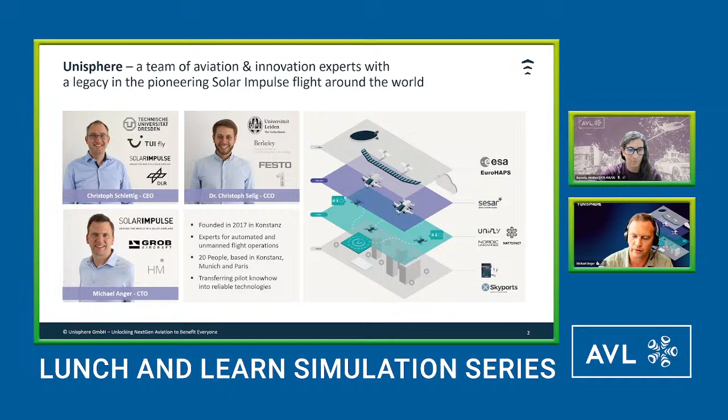Then the more new innovative air mobility segment of air taxis and eVTOLs. The drone space is the main space we are active in these days with software tooling and some infrastructure projects. So to say, we are passionate, and the whole team is aviation enthusiasts. So we have also a long-standing history in that space, and we originate out of the Solar Impulse project.

I'm not sure if one of you guys have heard about that project. It was the first solar-powered airplane flying around the world in 2015 and 2016, purely solar-powered, and it was basically giving the starting point for electrified aviation as we know it today. This is 10 years ago, but there's still a lot in common with what we do today.

For example, the solar powered aircraft at that time was flying very slowly with about 25 knots indicated airspeed, had the weight of a mid-sized car and the power of a scooter. So you can imagine that flight planning in those days was very challenging, especially as some legs of this flight around the world were quite long, and the longest flight was from Nagoya in Japan to Hawaii in a 5-day and 5-night flight, continuous by one pilot.

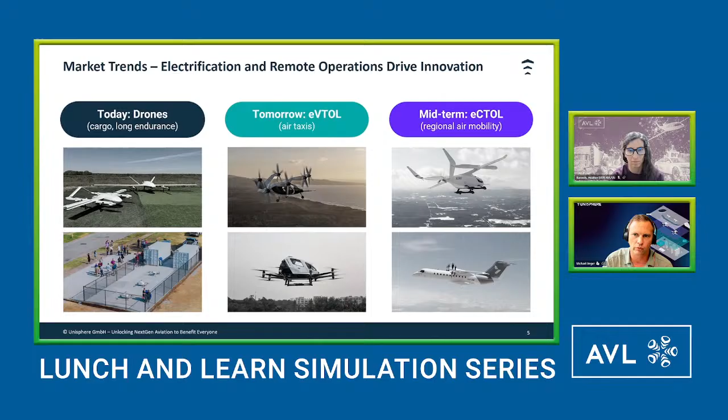And midterms, we will see some of the conventional aircraft being more and more electrified and transporting more and more people. So all of these electrified aircraft have some similar challenges, some more strong than others, but certainly new challenges with the rise of electrification in the aerospace world.

So one is certainly the uncertainty in range. The wind impact is quite significant. Imagine you have tailwind or headwind component on your flight, which makes the energy demand unpredictable, or at least hard to predict from a day-to-day basis or even during a day. Then the batteries are sensitive and degrade over time. So how much actual state of charge and how healthy is your battery is also something you need to monitor over the whole life cycle of a flight operation.

Then if you're an operator, you want to put a network of connections from city to city. So you need to kind of find out what's the best aircraft for a certain route, and how does this route and flight duration change over the season due to the different wind impacts or outside air temperature impacts. And then certainly, as always, cost pressure of airline operators. The promise is electrification is more simple to operate and cheaper in the end, but that's a promise. You as an OEM, as a designer, you have to really do and prove in daily operations.

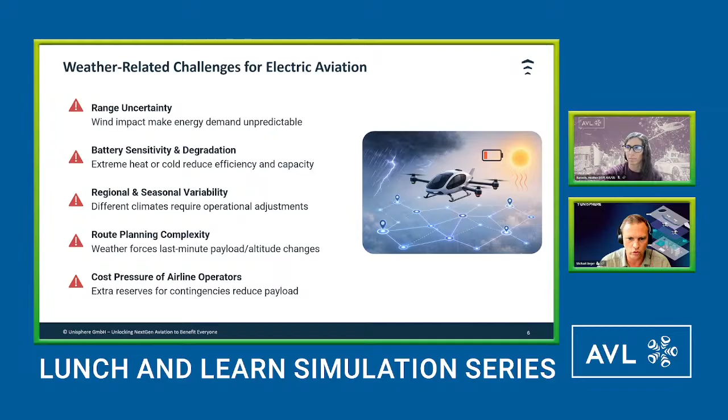So on our side at Unisphere, we like to approach this topic by creating virtual twins of flight. So we do large-scale simulations of flight trajectories. So we are able to simulate a flight before it happens. And we can tell exactly what the weather should be, at what altitude and what time. We can tell you about the actual flight duration or where the aircraft should be at what time and altitude.

And for this, we integrate aircraft performance models, from a very simple way to a very sophisticated model where we actually really do simulate the flight dynamics, so acceleration, deceleration, climbs, descent, and so on. And we have a service availability of high resolution weather data all around the world. All that together will basically create a virtual twin of flight.

And the second part on this slide is more about evaluating this data set. So as I said before, is it a go or no-go decision, for example? That's something you want to get out if you want to automate things. Now, with this data set, you can do two things. You can either use it in live operations to tell if a flight is go or no-go based on the energy, for example, or the weather conditions, or you can use the same technology with historic weather data and do studies. And I brought two examples.

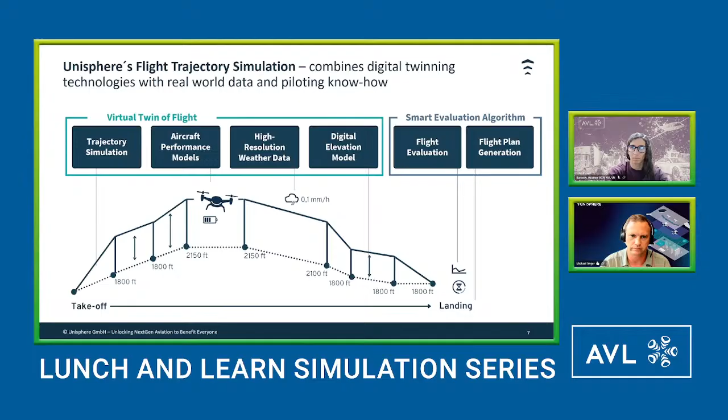One is a service uptime prediction. Imagine you're an airline operator and you want to know how often can I fly this or that route at Tampa Airport. And then you can give your operational parameters, some limitations where you say it's nominal, moderate, or severe. And in this output, where we looked at 5 years of weather data on an hourly basis, you can already see the condition change over the course of a year from nominal to more moderate conditions during the summertime, and to more nominal conditions during the winter time.

If you are now an OEM, you can also look into the more details of what are causing these moderate conditions, for example. And that's what the second graph is helpful for. So you see the gust factor line in purple or pink, being the main reason for the moderate conditions, why this is happening over the course of the year. And so you can design a more wind resistant aircraft, for example.

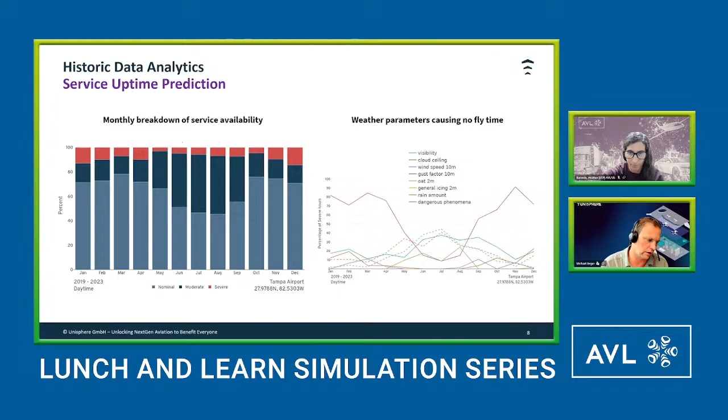Another example and a challenge for the eVTOL industry, so the air taxi industry, is icing conditions. So if you look at, for example, Calgary over the course of a year, you have a very high chance in the wintertime that you have icing conditions, which is here more red, and during summertime you have no icing conditions. So as a manufacturer, you should plan for that. Basically, you need to equip your aircraft with a de-icing system.

Whereas if you're going to operate in Atlanta, further at the bottom, you see that icing conditions is not so much a problem for daily operations throughout the year. So you can play with different configurations of your aircraft already at a design stage with these digital twins of a flight.

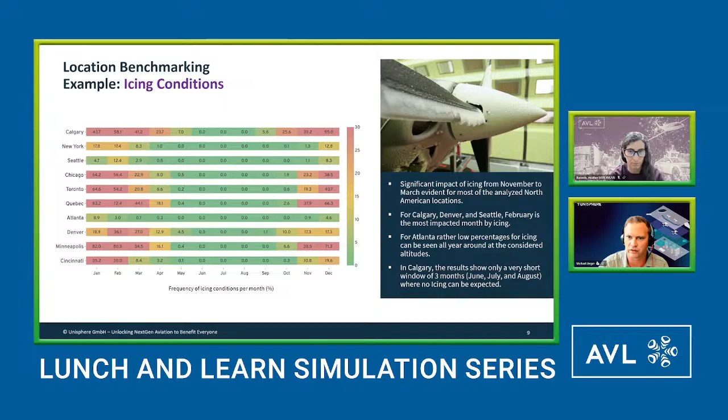Now, talking about our collaboration with AVL, we were wondering how we could combine the worlds of very detailed modeling in AVL Cruise M and the Unisphere flight trajectory world. So we were asking the questions: what could we do if we could replay a mission before flying it?

So we could create actual mission profiles like the real users would have, and then derive power demand and load profiles for testing engines or motors or batteries and so on, the whole powertrain. Or if the question would be like, what if the thermal behavior is different in a region like Dubai compared to something in New York?

So is there different sizing required of the insulation? And what if we could do all that in a reproducible and highly scalable way?

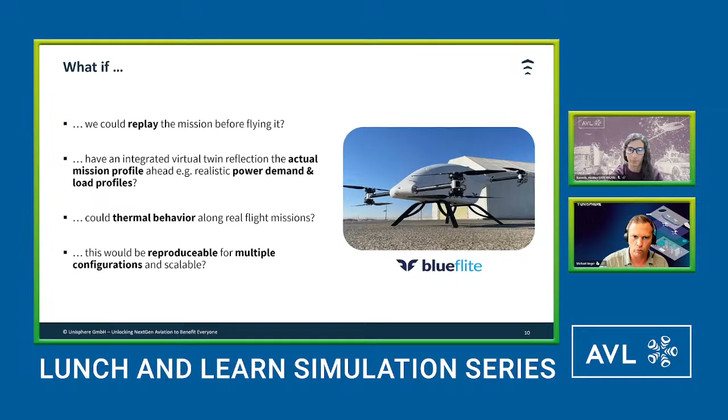So what we did over the last months was we basically connected both worlds of the Unisphere digital twin of a flight with the AVL Cruise M product to basically talk to each other and have a very detailed powertrain model running in the AVL environment, then asking for the flight trajectory information, so power required for a certain flight phase or operating conditions, environmental conditions, so that the user in the AVL environment could basically benefit from real world data.

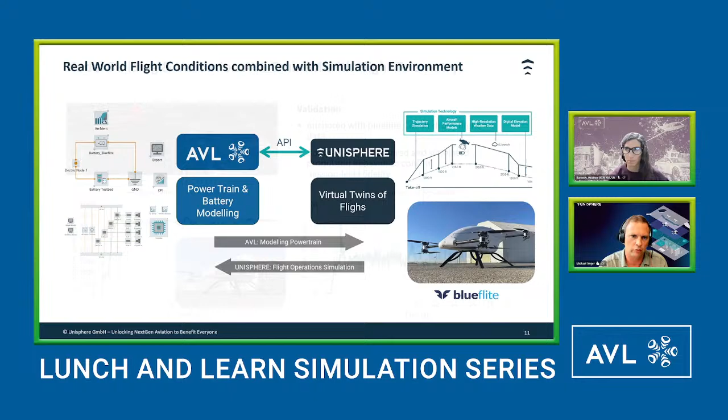With a partner from the US, from Blueflite, we were building a model that was the AVL part. So AVL built a powertrain model and then validated it against actual telemetry data, which are the two graphs below. I wouldn't go into detail right now. But model building is something AVL is specialized for. So that's what they did in the first place.

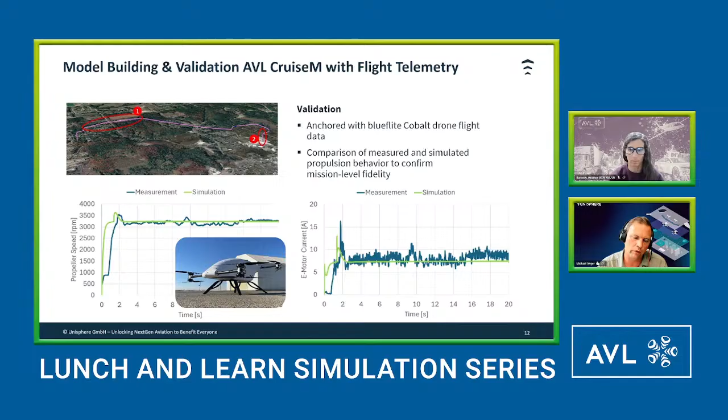And then we rerun that model with the flight trajectory prediction on 4 different locations. So this is a case study now on 4 different locations, but all equal flight distance, all equal vertical profile, and 3 years of data and hourly flights, which created 76,000 data sets of virtual twins of flights and cumulated like 29,000 hours of flight just within about 20 minutes. So that's really performant. And with this data set, you can now do further analysis.

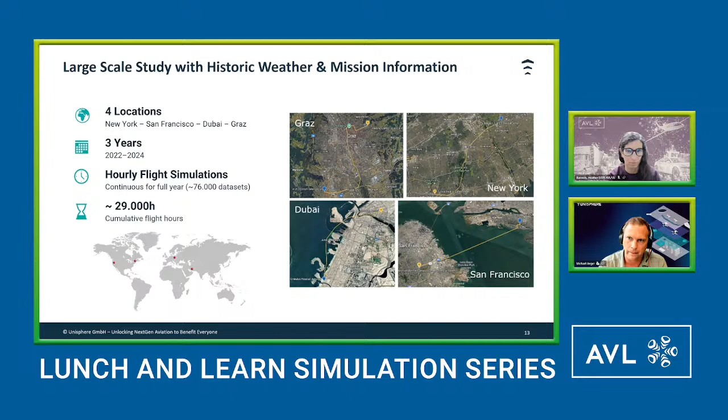Now, results. So certainly I can only give you a snapshot here, but one is interesting about the thermal behavior of batteries across location and years. And here for this case, I selected Dubai as part of the output of this study. And if you look at the top graph, you see these red charts with the temperature distribution over the course of a day through 3 years.

You see there's quite high outside air temperatures ranging up to even 65 degrees centigrade, but the majority is about 50 degrees centigrade. Whereas, for example, for San Francisco, just below, it's a bit lower, or New York is even lower. Now, this is not surprising, but if you look at the second graph at the bottom, you see the data staggered over 3 years, year 1, year 2, year 3.

And interestingly, the green curve is what I'd like you to point your eyes at, is that you see a cell temperature rise. So the temperature during a flight rising within a battery cell of the drone completely varies over the course of a year. And surprisingly, it's New York and not Dubai. Why is it New York?

If you look at the course of a year, you see the high temperature rise of a battery cell in the winter times in New York and not in the summer times. This is due to the higher outside air temperature. Sorry, due to the lower outside air temperature in New York during winter times, which increases the inner resistance of the battery and therefore increasing the heat created in the battery during a flight.

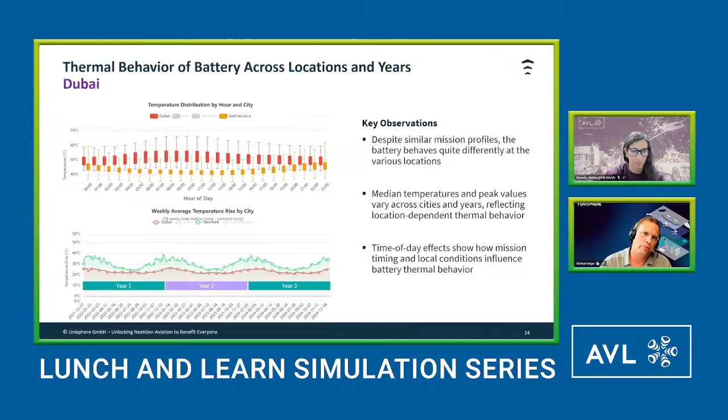Here's another example. Here it's more about a seasonal effect on battery state of charge. So what you see in this plot is the distance of a flight and the battery state of charge along that flight path. And this for different seasons of the year.

And what is interesting here, and with the effects explained earlier, is that the battery state of charge for the same route, same distance, same drone, same battery, varies over about 15% state of charge, just due to the different environmental conditions, mainly outside air temperature here, for the same flight, which is quite interesting to do the battery sizing or even exchange different batteries during the course of the year to gain more payload throughout the year.

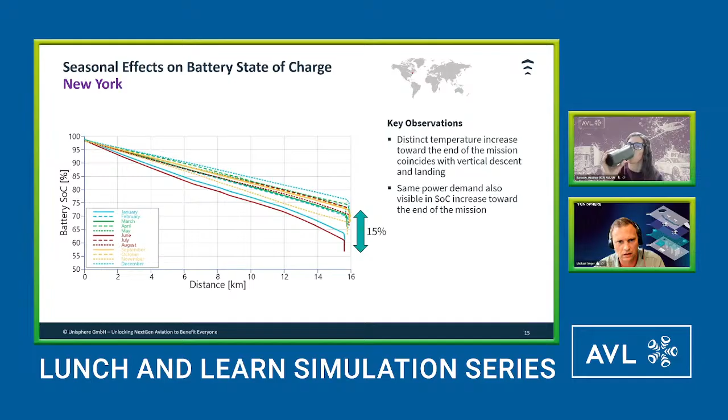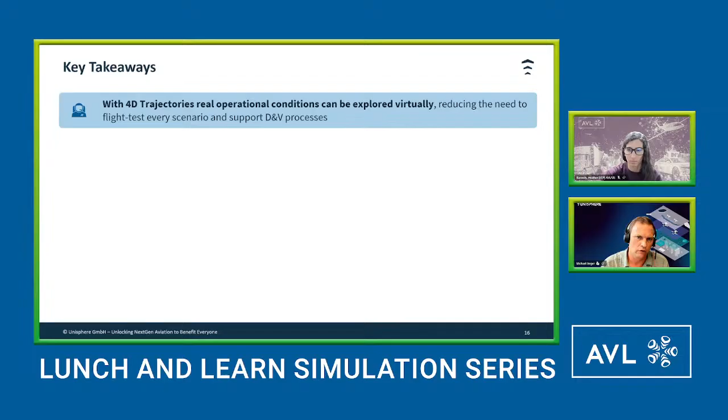Now some takeaways. What we proved with the AVL collaboration is that AVL makes it now very easy to explore different operational conditions virtually, which are really mimicking the real world conditions. So we can do that in a reproducible and scalable way, and you can start to do a lot of variant testing. And this certainly helps to reduce the number of flight tests you have to do, but it also supports the documentation required in aviation for design and verification processes.

One point I already mentioned is you can already assess at an early stage your energy and thermal margins. If it's worthwhile to do a modular design where on one hand you have an insulation, on the other hand not, or you play with the different cell sizing and packaging mechanisms you have. So this can be explored already beforehand.

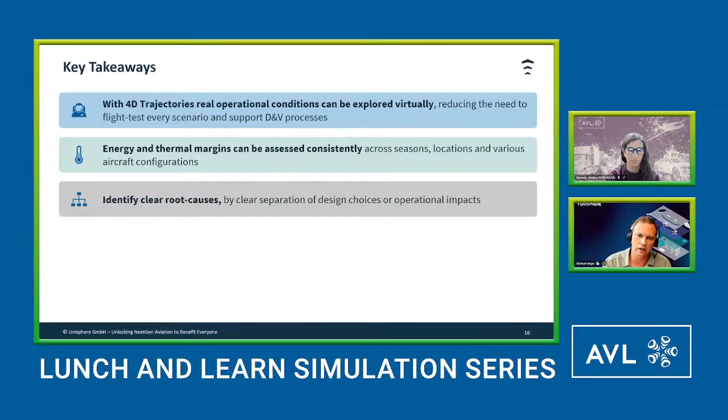With the modeling part on the AVL side, you have also a very distinctive model where you can find a good reason for the root cause of a certain effect and can play just on this little element, let's say the insulation of a battery, the thickness, for example, just by changing that, rerun the simulation, see the effects with real world conditions.

And the scalability certainly is a big factor because we can help you and AVL can help you to do that at a large scale and throughout in all places around the world. So you can compare different designs of your system in different parts of the world and then take the decisions whether it be a single solution or a modular solution for your product.

And last but not least, when we talk to the airline operators of the future, and here I mean really like the drone operators of the future, the eVTOL operators of the future, they are aware of these problems and they ask for solutions because they want to have a cost competitive aircraft which lasts longer than 1 year. So they ask about state of health, they ask about state of charge and the overall life cycle, how it would behave in the real world conditions.

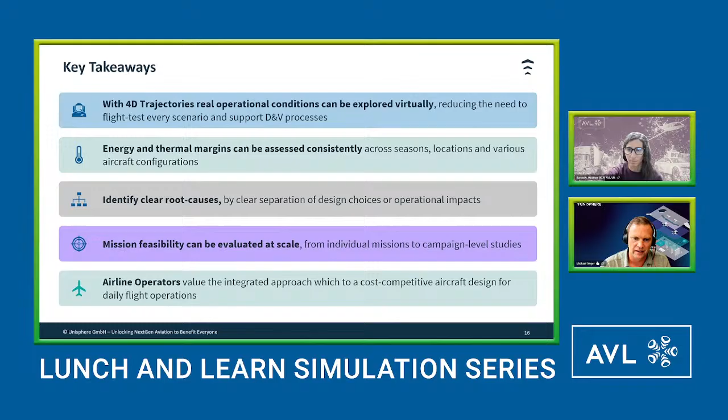That was surprising to see that there's such a difference in state of charge between, say, flying the same flight path in June versus December. So it's much more than just, as you mentioned, super important for the go, no-go flight. That's probably the most important question that you answer. But it also sounds like it changes quite drastically during the day. So in the morning, your flight path could look quite different yesterday versus today.

That's correct. Especially the temperature is one thing. Now operators already do some preheating or preconditioning of their batteries, but it's not just about temperature, it's also about wind conditions. So you have changing wind conditions over the course of a day. If you live close to a seashore, you know exactly about the diurnal behavior of seashore wind and landshore wind conditions. So that changes your flight time, and your flight time changes the minimum state of charge and all this.

So you can study a lot of different effects with high resolution, with real world weather data, not just like the average temperature of a location. No, it's really like, how would it operationally look like if I want to fly in the early morning hours, and does it differ if it's midday? And you want to get that certainty because in aviation, safety is still utmost. So regulators ask you as an operator for this information, and the operator will ask the OEMs about these questions.